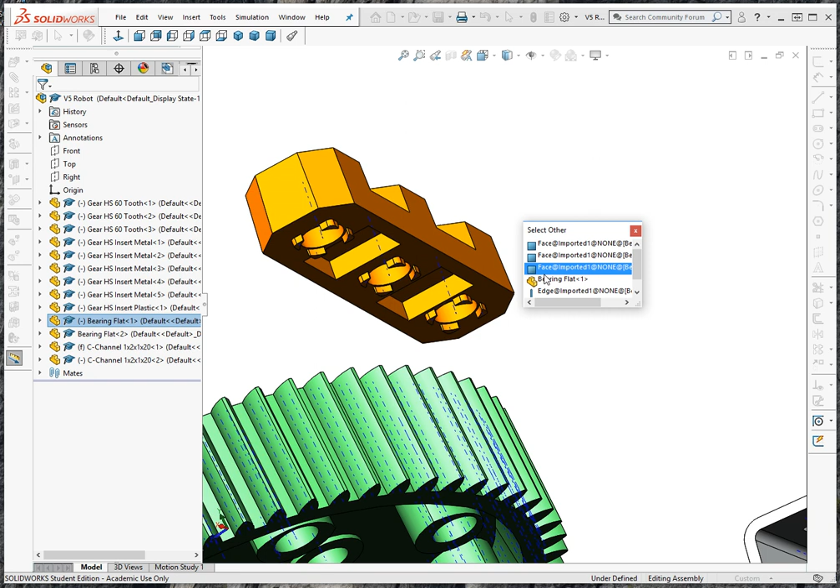You can also use a filter, but one thing you can do is just right click and select this button right here, select other. So now you can see as I hover over it, there's the face that I was looking for, but you can see it lights up the edge. Depending on where your cursor was when you did that right click, it's trying to guess all the different spots that maybe you intended to pick. So that helps you then pick the thing you want.

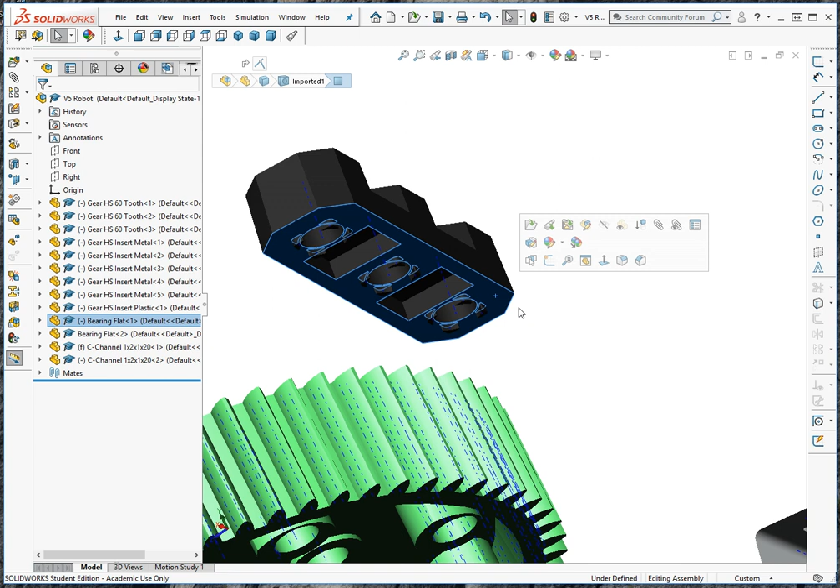The other thing you can do is actually turn on a filter so that you can only pick lines, or you can only pick points, or you can only pick surfaces. But the easiest way right now is just to turn the edges off. And so now if we hover over there, that's obviously what we want. And we want that to be on this surface over here. Okay.

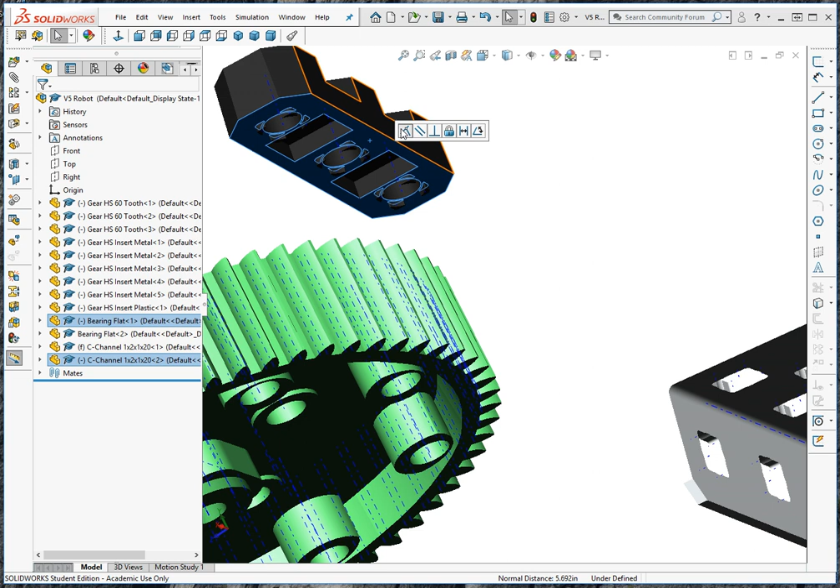And I forgot to hold down the control key, so I'm going to have to go back and do that over again. All right, so now I'll hold down the control key and it should give me that, so I can click that button. All right, and now the bearing is, I'm going to go back to shaded with edges. Okay.

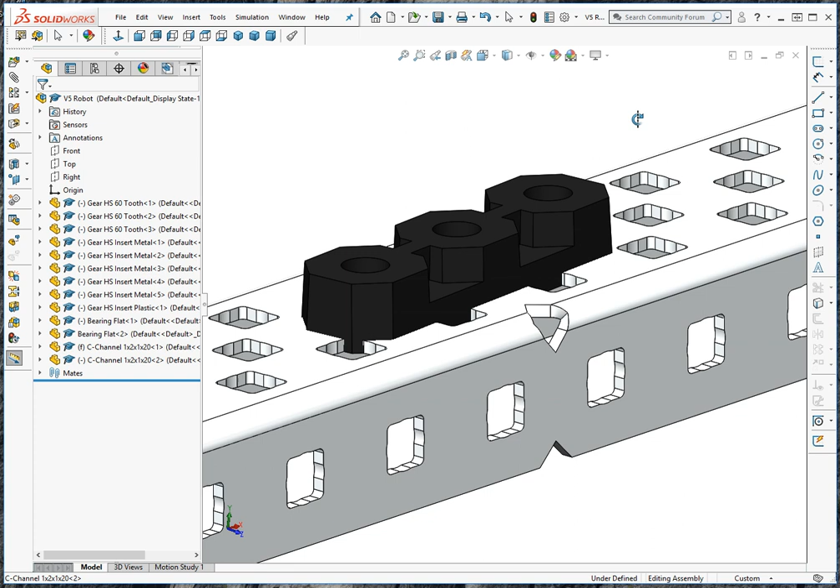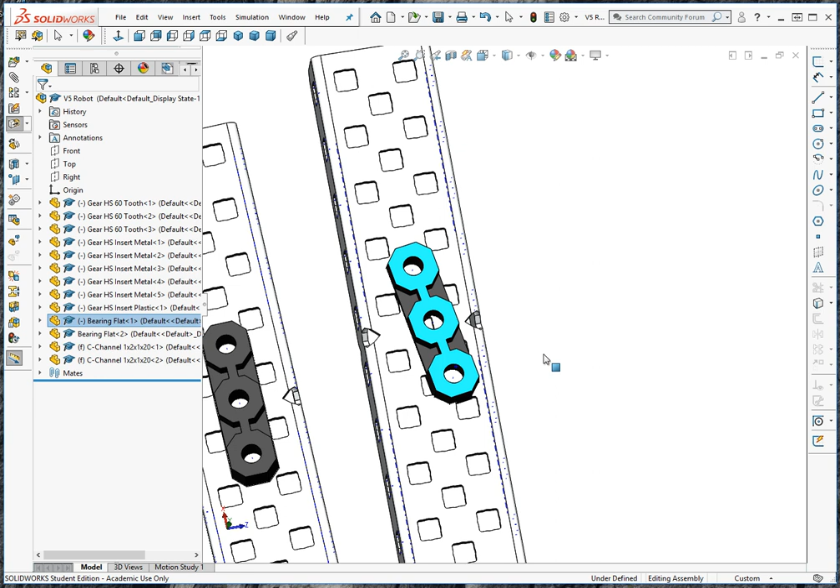Right. So now we have the bearing where we want it. And again, I'll right click on this and fix it. And just so that we can see that this bearing right now actually needs to be constrained. All right. So now I'll pick that axis and zoom in on this one right here. Hold down the control key, pick the coincident. Okay, so now I have the bearings in place there.

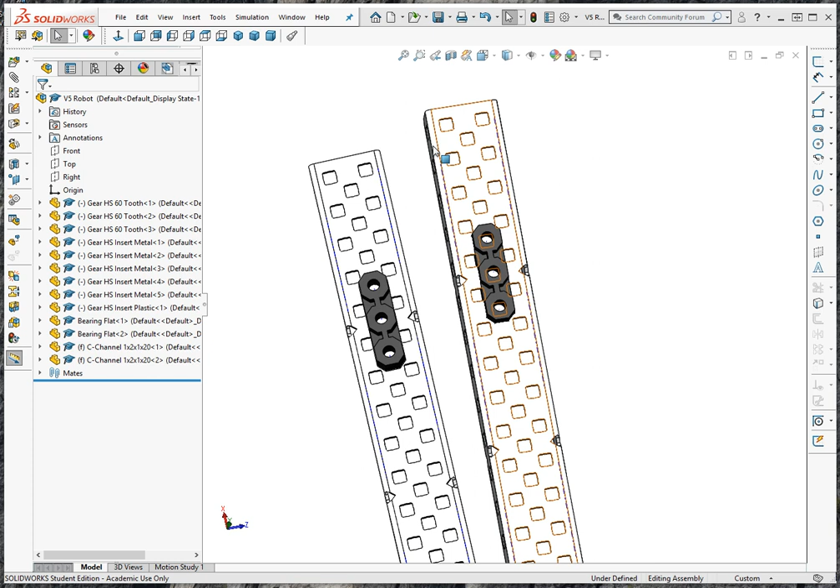Okay, so I'm going to do a zoom to fit now. And you could see that a couple of times when I was trying to move around, these other parts, which I don't really want to see right now in this assembly, were kind of in the way. So one thing we can do is, if I move this out enough, you can see you get this little fly out arrow here. And we can turn the visibility off.

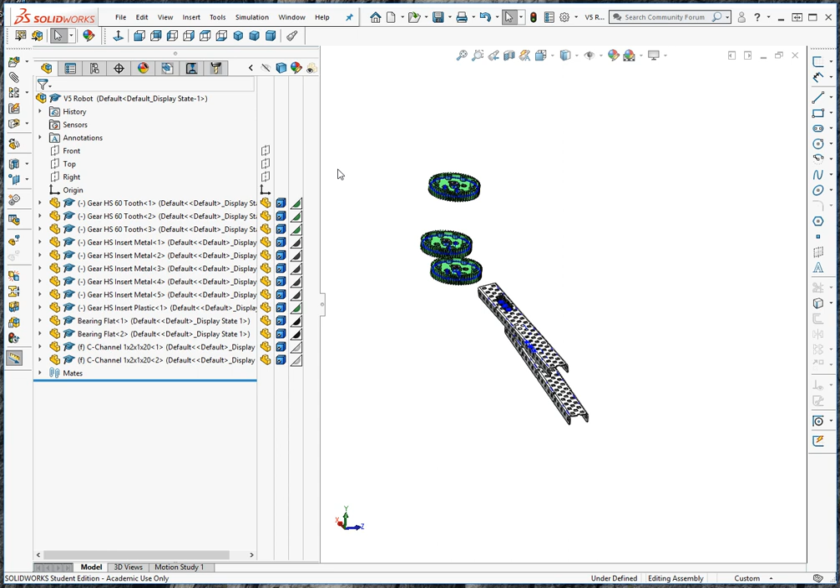So in other words, any of these parts that we don't need to see right now, I can just click down and just turn off the visibility. They're still in the assembly. I just turned off the visibility. And then I can just click that arrow to move that back a little bit, maybe move this back a little bit. Okay, so what do we need next?

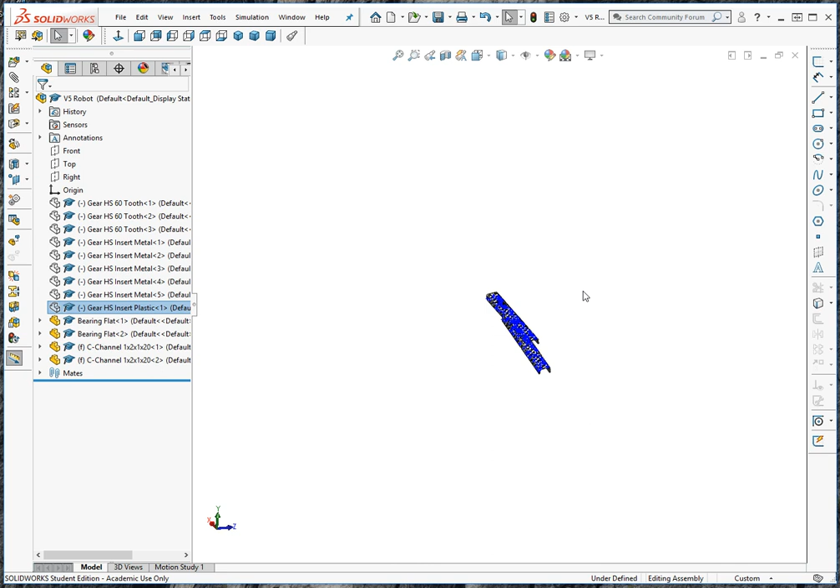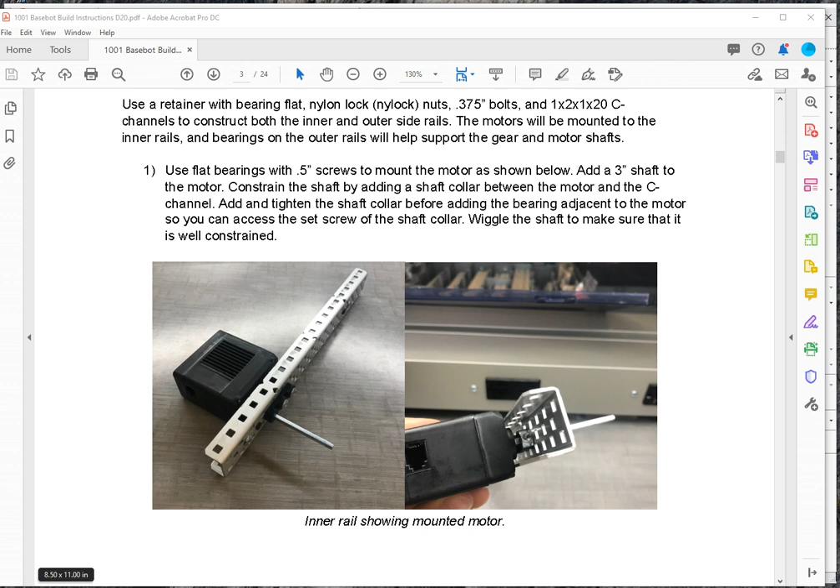We want to work with the motors now. Okay, so actually maybe I'll bring in the axle here and the screws. We also have a shaft collar on the other side. So I'm going to bring those parts in. All right, just pick on this button here. And again, put that pin on. And so we want to bring the drive shafts in. And I'm going to have to stop here and pick up from the next video.